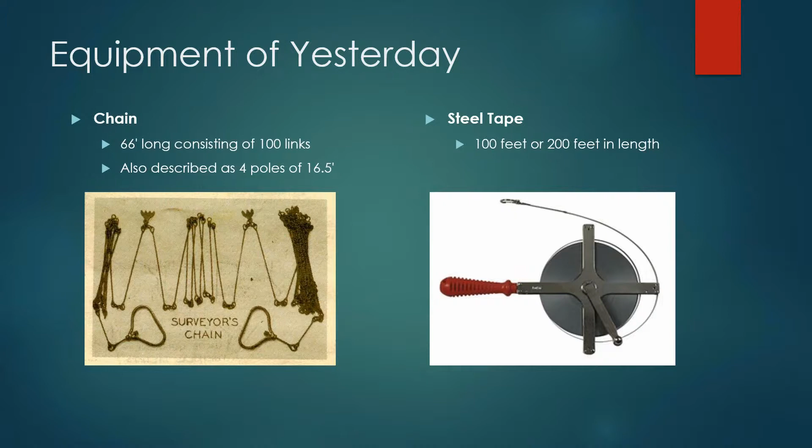The evolution of that chain was the steel tape. And although it seems relatively simple, these steel tapes were calibrated and measured against a standard for consistent distance measurement. Just to note that those are not available at Home Depot.

One other item of great importance that we need to discuss is the solar compass. So the solar compass is a precision instrument that was made of brass with a solar attachment that allowed the surveyor to determine the true north direction by reference to the sun rather than reference to the magnetic North Pole. It allows surveyors to locate true north through viewing the sun and other astronomical observations. It was not influenced by magnetism from iron ore in the ground.

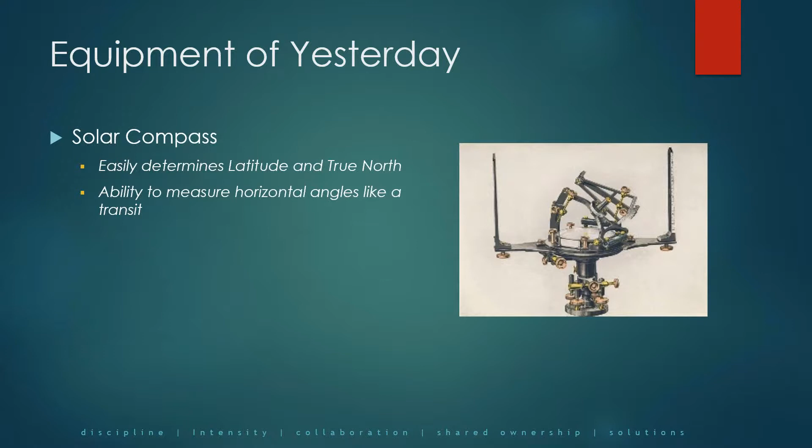The United States government required land surveys to be done by solar compass, as in many cases the cost to accurately survey lands with heavy mineral deposits that interfere with normal instrumentation would exceed the value of that land.

So moving ahead a little bit to today's equipment. Today we operate using things like the robotic total station, which replaced the solar compass. The robot is an electronic and optical instrument that's used for surveying. It's an electronic transit and theodolite integrated with an electronic distance measurement tool, an EDM, to measure both vertical and horizontal angles and the slope distance from the instrument to a particular point. This is coupled with an onboard computer to collect data and perform triangulation calculations.

The robotic portion, or servo-driven portion, allows the operator to control the instrument from a distance via remote control. This eliminates the need for an assistant staff member, as the operator holds a prism reflector and controls the total station from an observed point. It's really fascinating where these have come from and how great some of these advances have been in our technology.

While the steel tape was the evolution of the chain, the EDM, the electronic distance measurement tool, was something that took that even further. The EDM is laser driven, and when it originally came out in the 1970s, it was used to measure great distances that would have taken weeks and months to obtain.

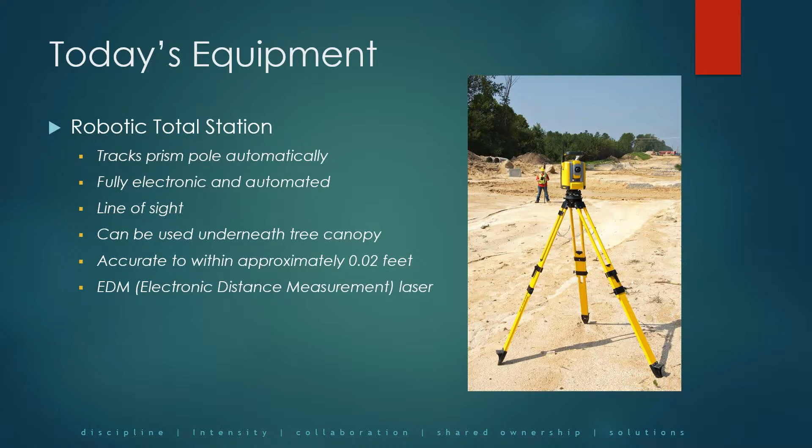And also, we routinely use GPS. Now, GPS is kind of a catch-all term, but its origins are complete within the United States. So the GPS system is a satellite-based radio navigation system owned by the United States government and operated by the United States Air Force. It is a global navigation satellite system that provides geolocation and time information to a GPS receiver anywhere on or near the Earth where there's an unobstructed line of sight to 4 or more GPS satellites.

GPS was launched by the United States Department of Defense in 1973 for use by the United States military and became fully operational in 1995. It was allowed for civilian use in the 1980s. So while GPS is something that started with the United States, there are also other satellites and other satellite constellations from participating countries.

China has their flavor, which is BeiDou. It's a regional system currently limited to Asia and the West Pacific. They plan to have global coverage by 2020. Galileo is a system that was developed by the European Union, and it began operation in 2016. GLONASS, which is Russia's global navigation system, is fully operational worldwide. IRNSS is one that was created and developed by India. And finally, QZSS is a regional navigation system in development that would be receivable within Japan.

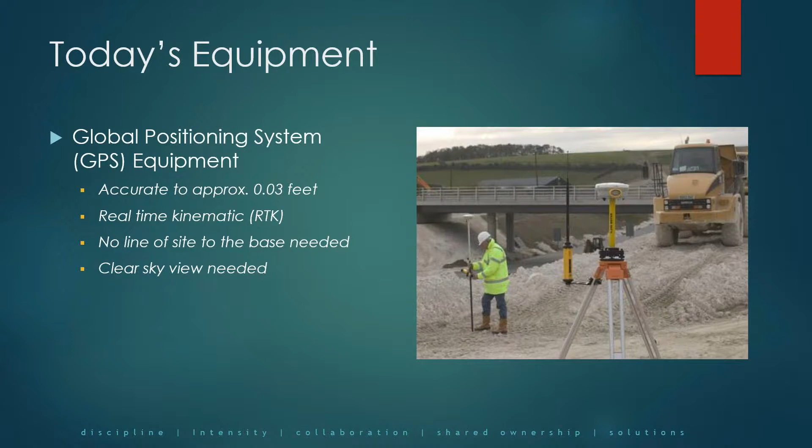I think it's also important to recognize in today's equipment the advantages of SUAS. So in 2016, the Federal Aviation Administration announced regulations for commercial operations of small UAS craft, or SUAS, those weighing between a half pound and 55 pounds, including the payload. The rules, which exclude hobbyists, require the presence of a licensed remote pilot in command for all operations.

Commercial operation is restricted to daylight, line of sight, under 100 miles per hour, under 400 feet, and Class G airspace only. It may not fly over people or be operated from a moving vehicle. These are outfitted with high megapixel cameras for small photogrammetric missions.

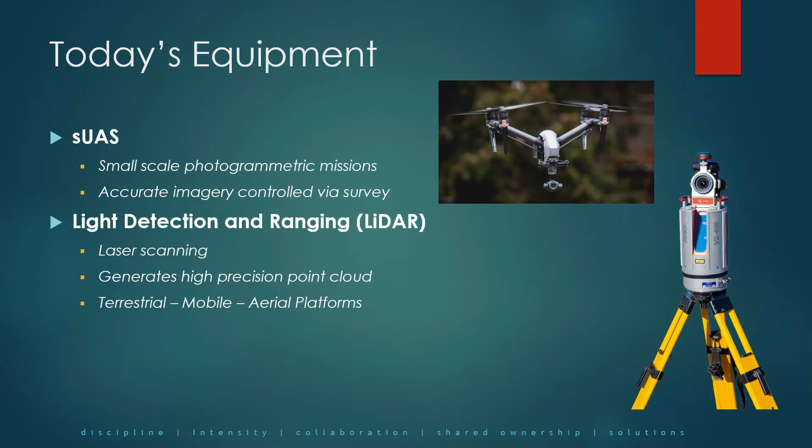And then also in today's wheelhouse, we're going to discuss LiDAR a little bit. Laser scanning and what it can do and where it's from, how we collect point clouds, and the applications of such. So terrestrial, which is either tripod-based or mobile, and then aerial platforms via either fixed wing or rotary.

So now we're going to talk a little bit about some of the more common types of surveys and mapping. When I was putting this together, I thought, holy cow, there's so many different varieties of surveying. So I'm going to paraphrase here and do my best impersonation of Bubba Blue from Forrest Gump.

Anyways, like I was saying, surveying is the fruit of the engineering seed. You can map it, stake it, plat it, fly it. There's bathymetric surveying, aerial mapping, topographic surveys, boundary surveys, easement surveys, legal descriptions. There's monumentation, horizontal and vertical control surveys, bridge monitoring, UAV surveys, drainage surveys, roadway surveys, transmission and distribution line surveys, rail and hydraulic surveys, ALTA surveys, and subdivisions. That's about it.

Let's talk a little bit about the backbone and framework of horizontal and vertical control. To have a workable map that's relative unto itself, the governing location and position has to be correct and accurate. This is where your project is going to be located on the earth, and this needs to be known to clearly be able to make a comprehensive map later on. It has 2 components, one of horizontal location and one of vertical location.

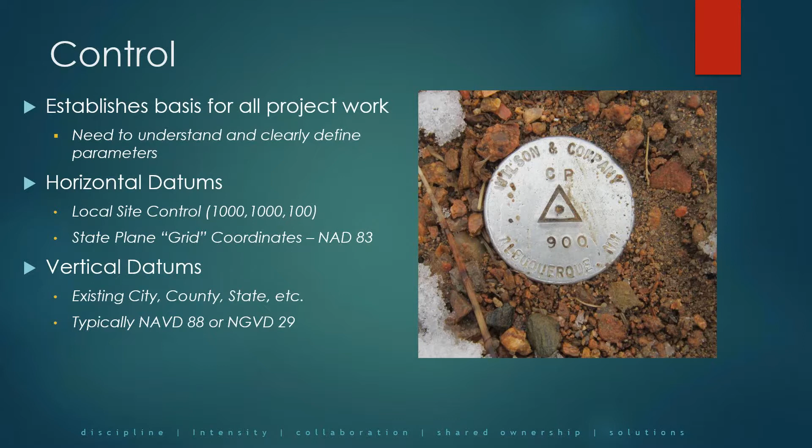Now, the NGS is the governing body of these publicly available control values. So horizontal and vertical control, or NAD 83 and NAVD 88, is governed by the NGS. The NGS and this website is absolutely fantastic if you're in any of the geospatial realms. I absolutely love their tools, and I think they're on the cutting edge of what's out there. They seem to be truly progressive.

At its core, where we derive horizontal and vertical control is the NGS data sheet. The NGS data sheet is a text file which contains data for a survey control station, either vertical or horizontal, and to what fidelity it is. Data sheets for horizontal control show precise latitude and longitude. Data sheets for vertical control stations show precise orthometric heights. Other data may include your geoid height, your state plane coordinates, and a description of how to reach the mark and other recovery information.

With the evolution of GPS surveying and CORS networks, these monuments are becoming less and less relied upon, but they're still out there. And the NGS toolkit actually has a tool where you can go on there and locate them within the nearest distance to you.

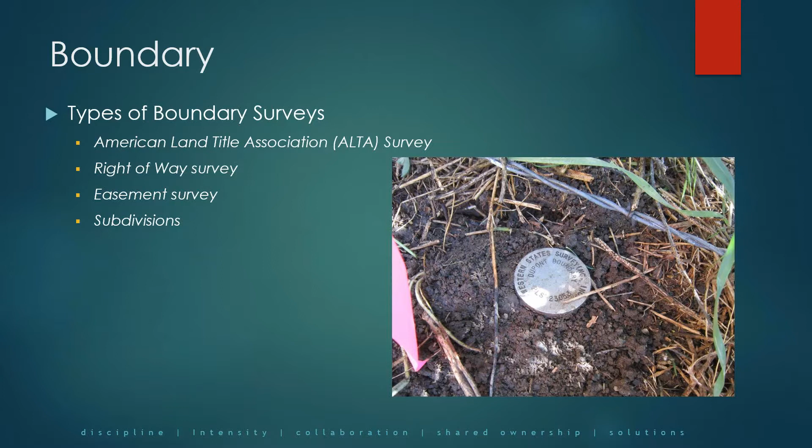So the American Land Title Association came out a while ago and decided to find a way to help insure the title company and/or lender on a piece of property. And an ALTA survey goes through and it will provide a running title report of what the property has been, any servitudes, easements, or anything like that that would be found or recorded on a piece of ground.

We like to call it the Cadillac of surveys because they're very complex, can be expensive, but you're going to get the absolute most data that you can from it. We had mentioned, of course, that there's boundary lines, but the location of any improvements, and when they say improvements, that means something with a foundation or something that's more permanent in nature.

And then identification of easements, access rights such as water, gas utilities, telephone, railways, and other utilities, and also to give the recipient of the ALTA survey some confidence in where their boundary is. Any encroachments or gaps or overlaps in the title work will be revealed on the ALTA survey.

Additional optional requirements are known as the Table A, and that can include things such as building setback lines, height of structures that are on the site, areas of disturbance, if there's spoil piles from excavation. These truly can be the most illustrative survey that we can create.

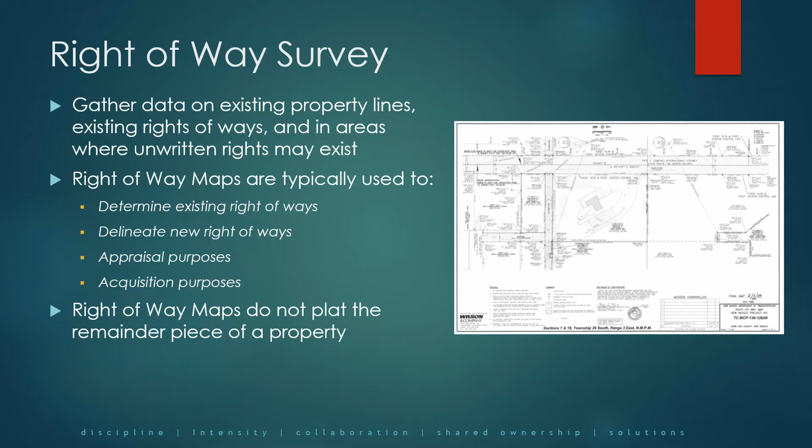So if you have Google Fiber coming through your neighborhood or something, and they want to acquire a 5-foot easement, potentially you could say that's a right-of-way survey, or something to show where the public's interest may lie. Now, one thing to remember about right-of-way maps is they don't plat the remainder of a piece of property.

So an easement survey, and the legal definition of an easement, is the right to cross or otherwise use someone else's land for a specified purpose. Typical uses for easements are utilities, access, which would be ingress, egress, and other encumbrance that the real property may benefit from later on.

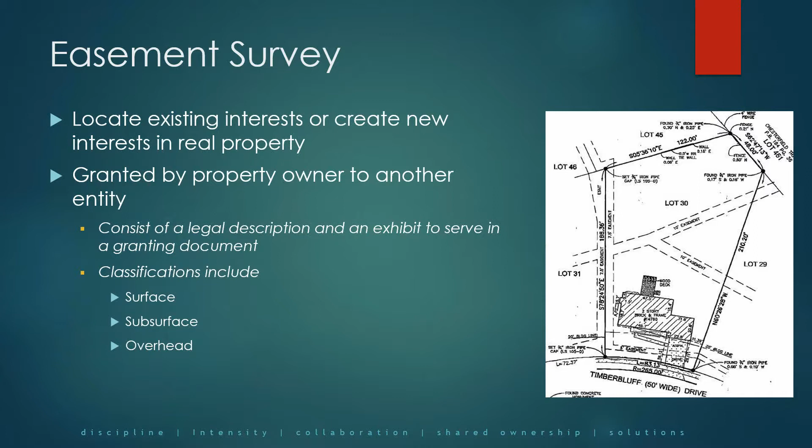Classifications of easements can be on the surface, like a roadway or an access drive, subsurface, as in you bury utility, and overhead, like a transmission line. And finally, in boundary surveys, we have subdivisions.

A subdivision is simply taking a larger property and breaking that into usable areas for residences, commercial land, larger utility facilities, and to dedicate roadways or corridors. It can be, as we state here, as simple as mom and dad own 40 acres and we want to cut 5 acres off for us, or complex, maybe in a residential subdivision where you have hundreds of lots.

All right, moving into something that I really like is topography. So topographic surveys. Topographic surveying is defining the land, the terrain, the features that may be out there. So a topographic map that we would create is characterized by large-scale detail and representation of relief, usually by contour lines. Topographic maps show both natural and man-made features.

They also can show planimetric features, and some of the data collection methods that we use are conventional, such as GPS or robotic total station, aerial mapping, and LiDAR. And then the data uses are for engineering design, contour generation, a DTM.

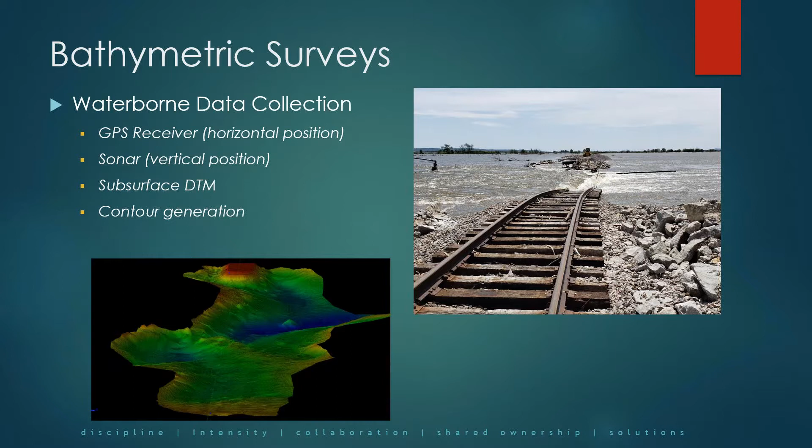So let's jump a little bit into LiDAR here. So LiDAR is light detection and ranging.

The methods, and I think I've mentioned this before, the methods we use are fixed wing, rotary, and then terrestrial versions of mobile and static. There's advantages to each. So the basic principle of LiDAR data collection is a combination of three things: laser ranging, GPS, and an IMU. LiDAR is an active sensor and can be acquired at night if you don't mind your point cloud not being colored as in true color or using imagery to illustrate what it's actually doing.

For fixed wing LiDAR, these are large areas. This is an airplane mounted sensor. This is wide area mapping, floodplains, counties, some forestry applications, larger landfills and quarries, and able to achieve 1 and 2 foot contour interval projects. This is really what you want if you need to survey a very large piece of ground quickly, this is the only way to go.

Rotary wing is a little more focused on something that's a corridor. It has a little more narrow footprint, but the accuracy starts to go up. So these are excellent for uses in corridor mapping scenarios like a roadway for the DOT or transmission corridors. Some pipeline projects have been mapped using rotary wing LiDAR. This is a high point density for smaller feature identification, and it's amazing how far this technology has come in just the past 10 years.

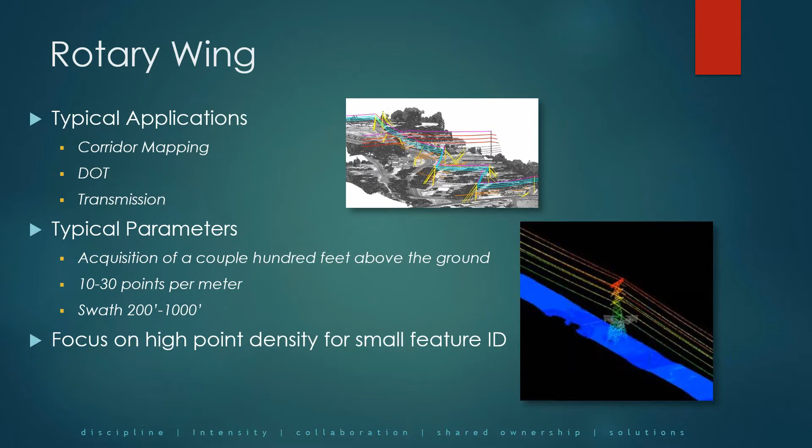And then moving down a little bit closer is the mobile data collection. Mobile LiDAR is very good where you don't need like a perpendicular line to the ground. You need to see what it's doing horizontally. This will acquire several points per square foot. It's a very dense point cloud. This is accompanied with a camera or imaging sensor for a colorized point cloud. We control the point clouds with targets that are located using conventional survey methods, so a robotic total station or GPS.

This gives you greater detail. We see most applications on this in transportation projects where paving depth is important, or areas that are going to be obstructed later on. This is a great way to do it.

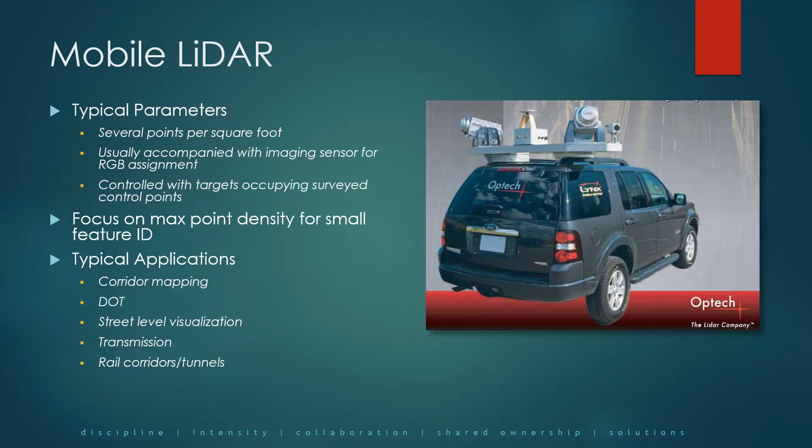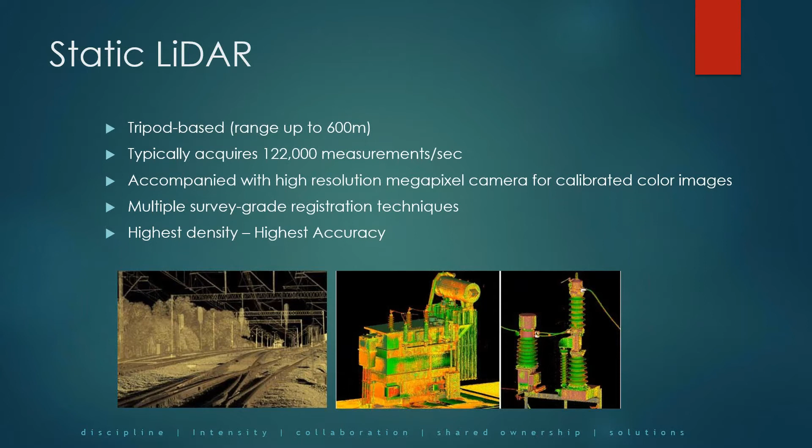And then finally down to the tripod-based LiDAR. These are going to be your smaller areas. One thing to note about static LiDAR that we have found advantageous to us is the ability to measure areas which may be unsafe for surveyors to access or difficult to reach areas. If you have radiation concerns or confined space concerns, if you have traffic to worry about, this can be an excellent tool to map those areas and collect that information without putting your people into harm's way.

Some of the typical applications that we see are, of course, civil engineering. That's our bread and butter. As-built surveys, moving into architecture and BIM seems to be very popular now. Archaeology and cultural heritage documentation is really great because you don't have to physically occupy the points that you're trying to collect. It's very good in mining. We really like it for bridges. Our structural guys really are impressed with the level of detail that we're able to collect and how safe it is. Roadway intersections, and then, like we said, unsafe to access areas.

We've found that by using a tripod-based approach, we can reduce the amount of time that we have people on site. We can reduce the amount of traffic control. It's also less of a disruption to the general public when we're doing this.

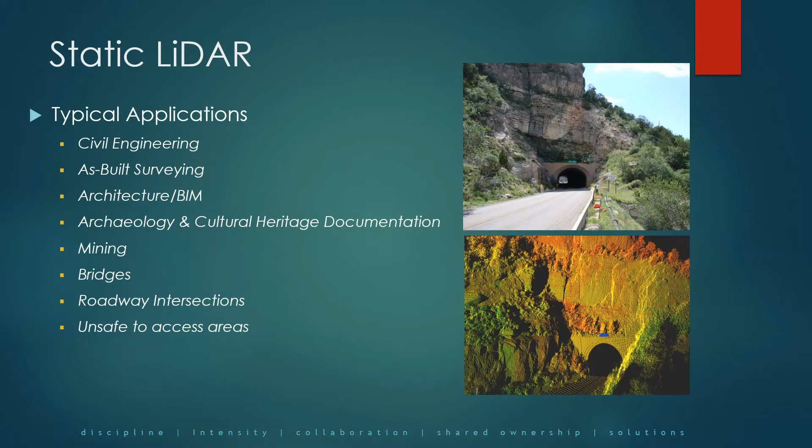And then to kind of round this out, construction surveys. So construction staking, or typical applications that we have here, is this provides a builder with planned grades and position of new improvements to be made to the real property. We may mark this with stakes, hubs, posts, nails, and color-coded flagging to guide construction crews on how much earth to remove, add, and where to build.

Post-construction, routinely we'll get asked to perform an as-built survey. An as-built survey is where surveyors collect data about the improvements made, and then the information that is gathered is compared to what was designed for accuracy. You know, sometimes contractors don't always build what they said they would. An as-built survey can serve as a record of construction.

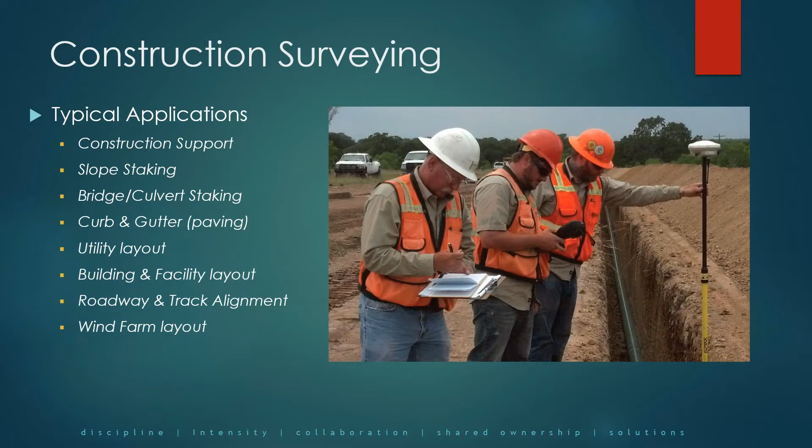So now kind of moving into the next section of scoping a project for surveying, there's some critical elements that I think that everyone should probably be aware of.

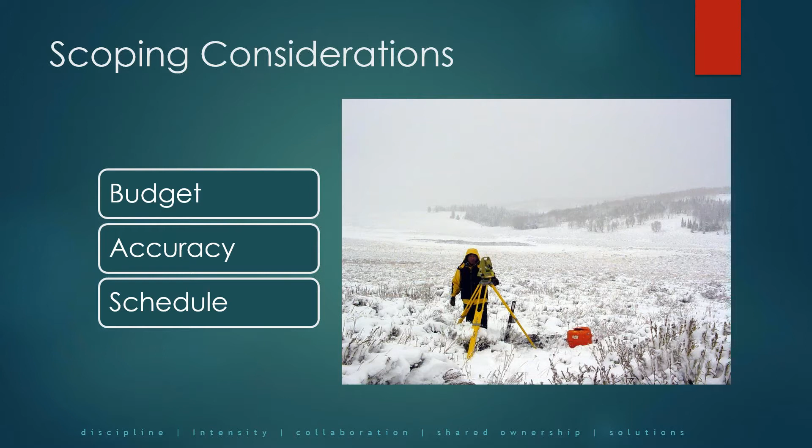The largest considerations are: what's your budget? What accuracy are we trying to achieve? And what's your schedule that you'd like this done in? Sometimes we don't always have the benefit of knowing all this criteria, but this is something that you probably want to discuss with the consultant before you start to scope your project.

Some considerations to look at: Is there existing control on site? Is there some legacy system that we would need to acquiesce to? Is this part of a larger project? And finally, what's the purpose? Why are we building what we're building? Why are we surveying this?

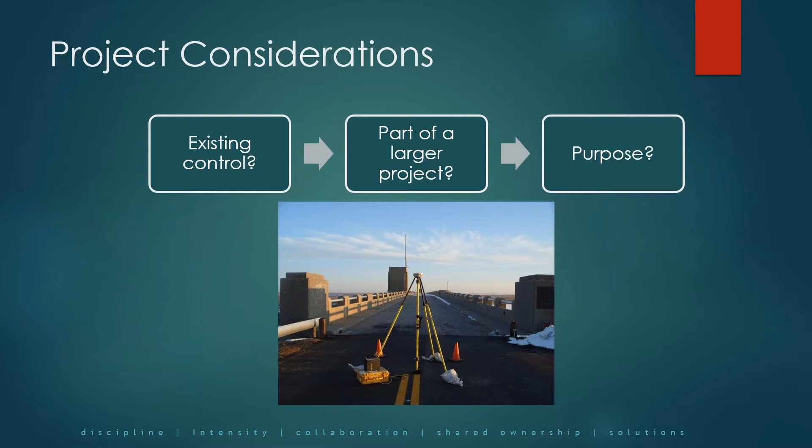So, in summary, for scoping, identify your purpose, find the type of survey needed, clearly define the limits of what you want measured, specify your control parameters and accuracies, identify any critical points that are needed, and then finally, what is the delivery method going to be?

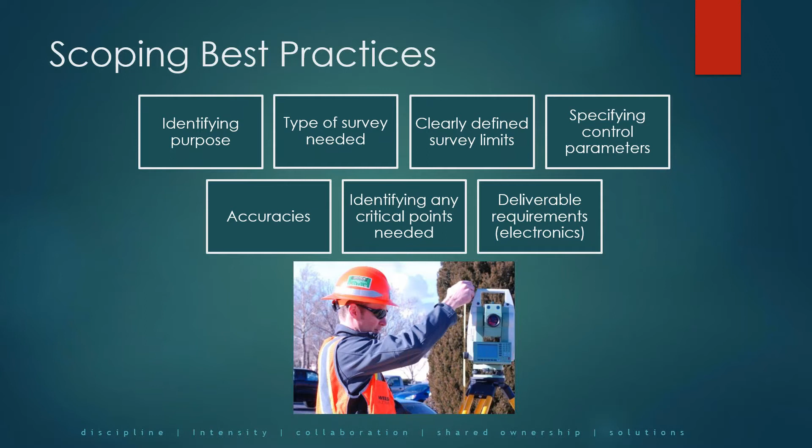For design plan best practice, you want to use published survey control and record data. You also want to look at the constructability of what's going to be made. You will need a way of checking it as built, and then provide electronic files to the consultant to help you determine what to do.

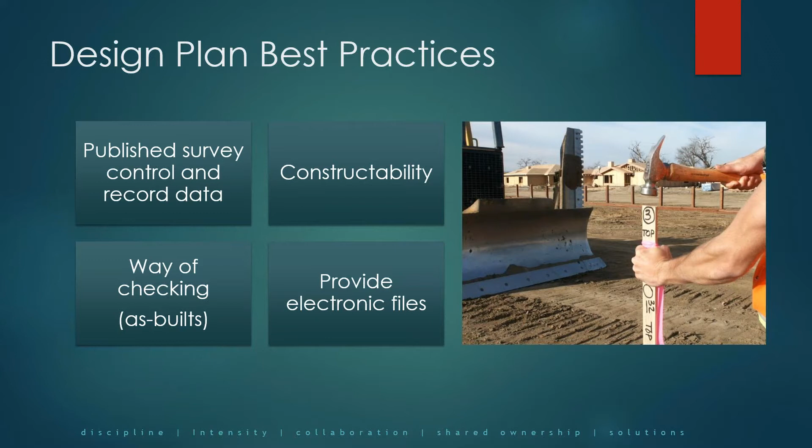Finally, there are many tools and combinations to choose from. Collaborating with your surveyor or engineering firm is key to receiving the best survey for the lowest cost. The project size, layout, and required accuracies help determine the type of survey needed.